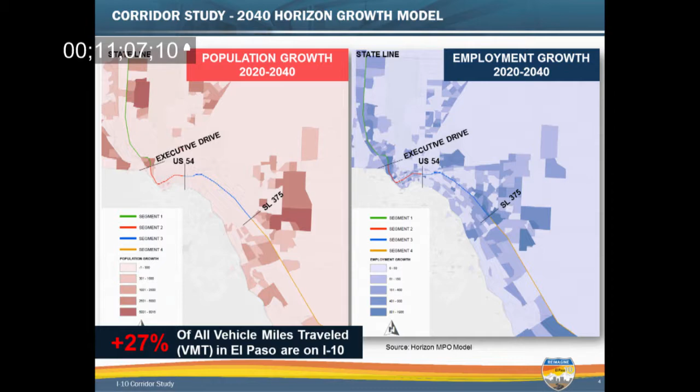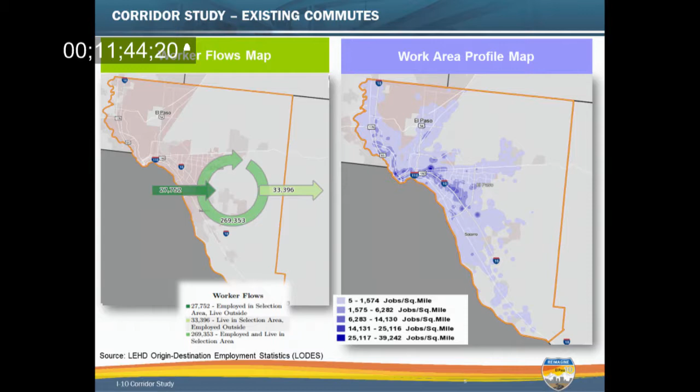However, the employment growth still follows the I-10 corridor, which is still going to be that vital lifeline in El Paso that it has been. We looked at the worker flow map and where the jobs are at and where they're coming from. As we looked at that, the majority of the employment is staying here in the El Paso area. We have some employment that's reaching outside, and some that is leaving this area as well, but the majority of it's staying here. Once again, the work area profile map is centered on I-10. I know this is not new to you guys.

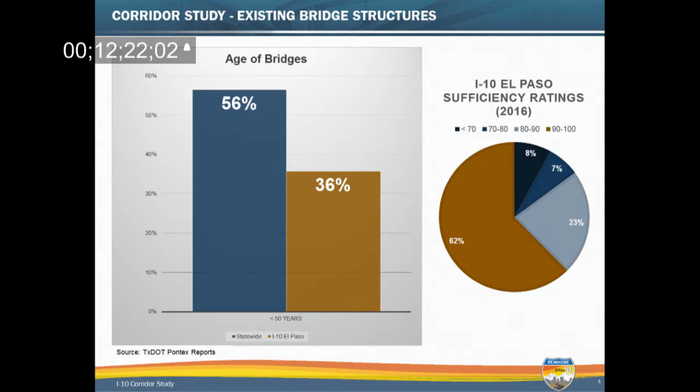One of the other things we wanted to look at is the age of the infrastructure, not only the pavement, but the bridges, especially the bridges. When you look at the El Paso area, 36% of the bridges are less than 50 years old, whereas the statewide average is almost 60% less than 50 years old. So there's a real need to take a look at the infrastructure in the area. The good news is that the sufficiency ratings on the structures still remain high, so we do have some life left in them. But when we're looking at a study that's 30 years into the future, we need to start coming up with a plan to replace that infrastructure. That's one of the things the study is going to do.

We started this study by looking at 6 main goals and objectives we wanted to accomplish. One of them is obviously mobility and circulation—how we improve that, not just on I-10, but also in the areas just adjacent to I-10 and some of the major corridors that parallel it.

We want to make sure we're being good stewards of the environment. We also want to look at multimodal—making sure we've addressed how transit plays into this, how we're addressing truck traffic, as well as the bicycle and pedestrian component.

We want to look at design. One of the key things we're dealing with on this study is the new requirement to have 18.5-foot clearance on major freight routes. That's one of the things we're looking at, which specifically impacts the downtown area when you've got all the bridges going over there right now.

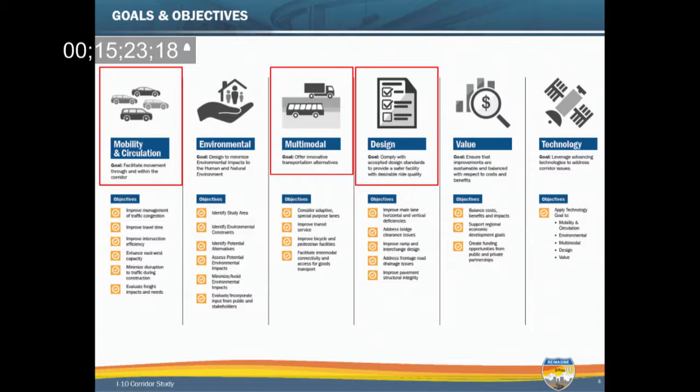So that was kind of the background of the study. I want to get a little bit into the no-build scenario to kind of emphasize what the problem is and the issues that we're trying to solve.

Many of you are probably familiar with the term level of service, but I wanted to talk briefly that it's really just kind of a report card on traffic condition, where A is free flow and F is really pretty much gridlock in the corridor.

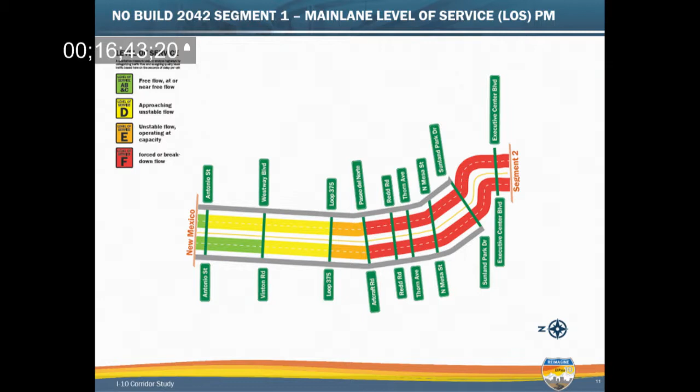So what you're looking at here is a map of segment 1 with 2042 traffic shown on it if we don't do anything to the corridor. You can see that really from Artcraft Road to the downtown area is really going to be operating in a level of service F, or gridlock condition, with the 2042 traffic. So there's an issue there that we need to resolve.

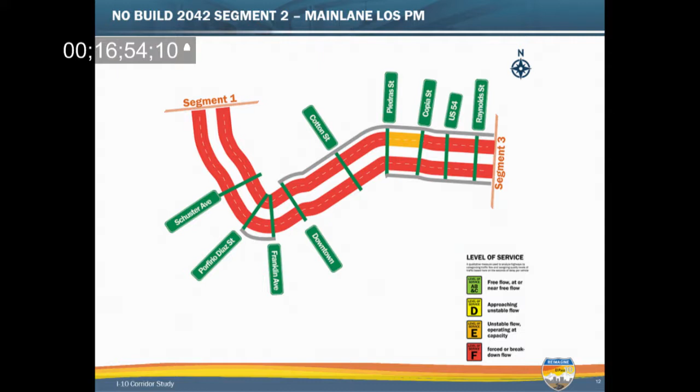I move on to segment 2, which is the downtown from Executive Center to US 54. You can see it's pretty much all red. It's pretty much all level of service F throughout that segment of the corridor.

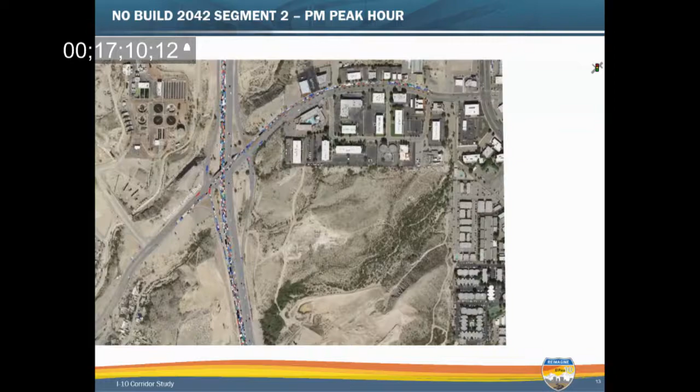Similarly, in segment... well, let me pause for a second and show a traffic simulation model that we developed for segment 2, from Executive Center down to US 54. This really kind of highlights the problem that we're trying to solve.

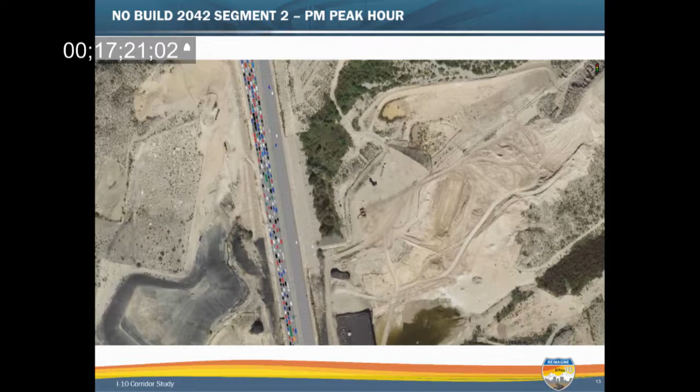What you see is on the eastbound side, severe congestion, obviously gridlock condition, starting at Executive Center Boulevard, and it goes all the way through the downtown area. You might say, well that's great, but look at the westbound side, that looks like it's flowing pretty good. Well, what you'll see in a minute is why it's flowing good is because it's being blocked from a ramp that's congested in the background.

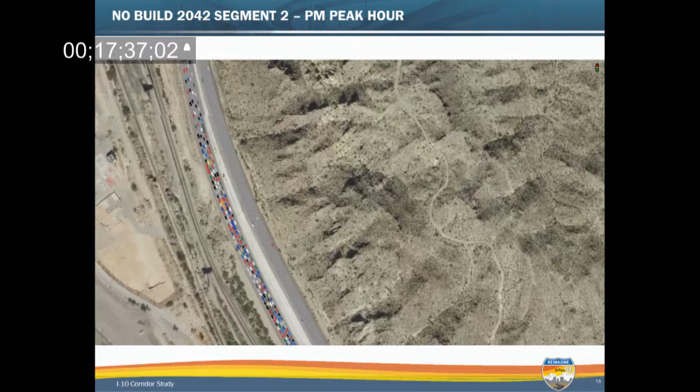Was this taken yesterday? It could have been.

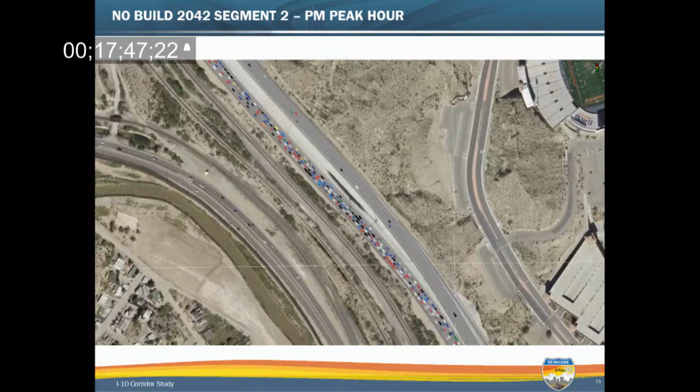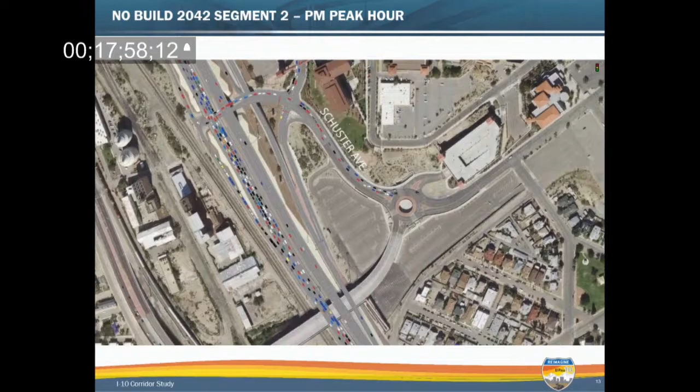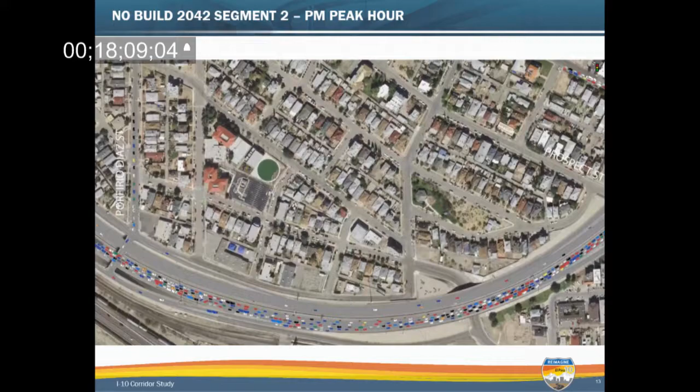So this is a familiar thing that you'll see, and I'll let it run through the downtown area. You'll see this is approaching UTEP right here, the Schuster Avenue. Then as you approach the downtown area, it continues to get bad. Then once you get east of downtown, between downtown and US 54, you can see the congestion on both sides is really significant. Brian, you might want to add that this assumes the Border West has been built.

True, Spur 10 is finished. All of the projects that are currently planned or under construction have been implemented. So you can see right here, coming into the picture, why the westbound was so nice — it's because it's been blocked by the Missouri ramp on the model that we were showing.

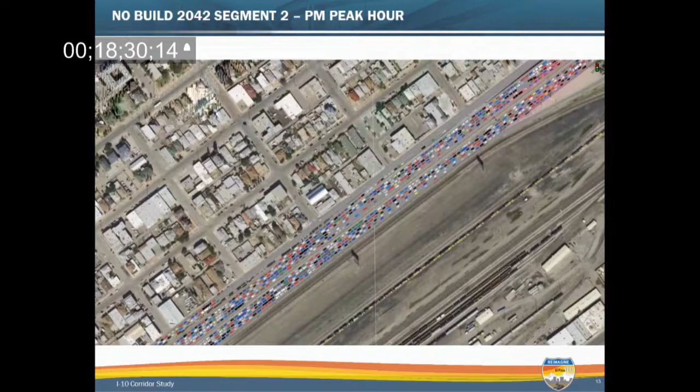So now you're in that piece from downtown to US 54, and both sides are really backed up. But like Brian said, this is not addressing construction — this is not construction driven. It's got all the major projects that are planned included in the model, and that's what we're seeing in 2042. So it shows that there's still an issue that has to be resolved.

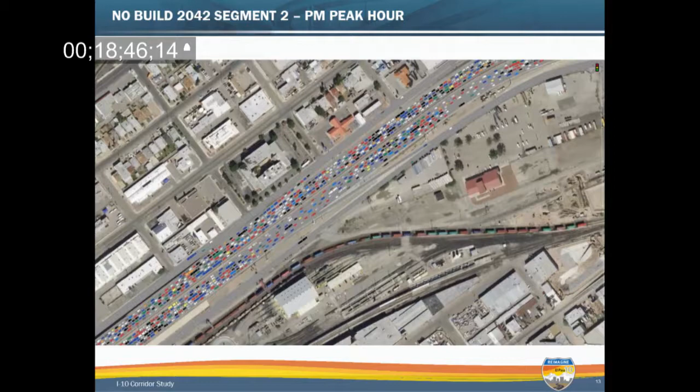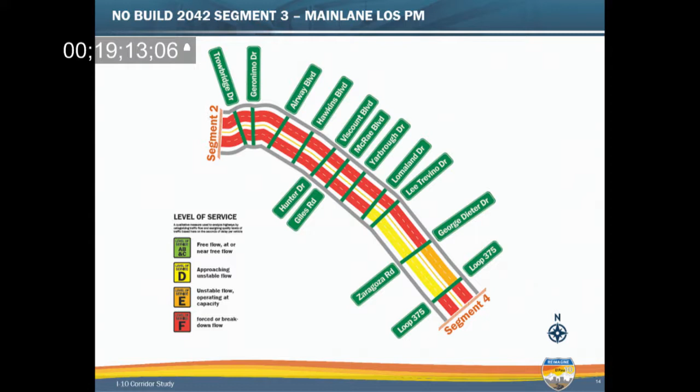I'm going to go ahead and move forward to segment 3, because we have a very similar issue there. As I mentioned before, the big culprit we feel in segment 3 is the number of ramps in that area. We have a ramp density below 1 mile, which is very densely packed ramping. So as you'll see in a minute, one of our solutions is to address that ramping component. But because of all that friction, we're seeing level of service F throughout segment 3 as well.

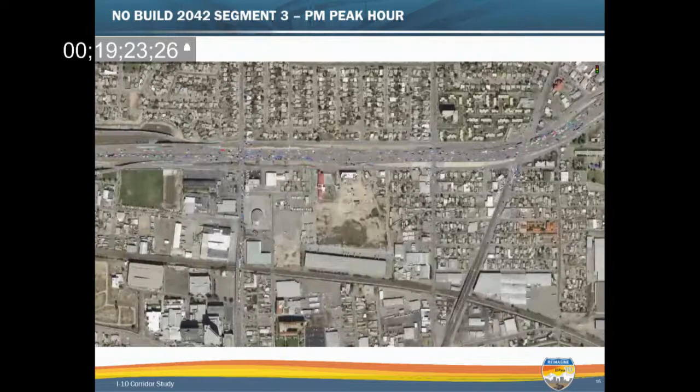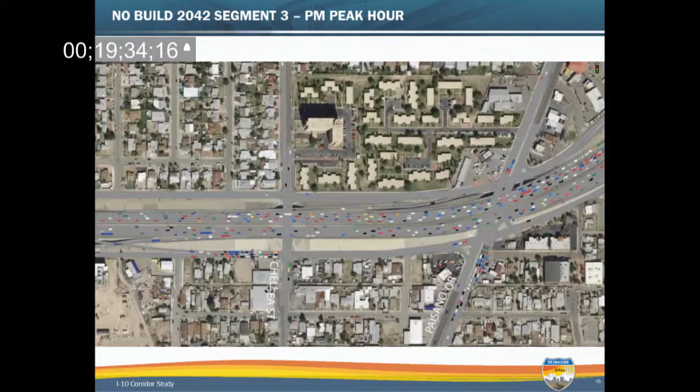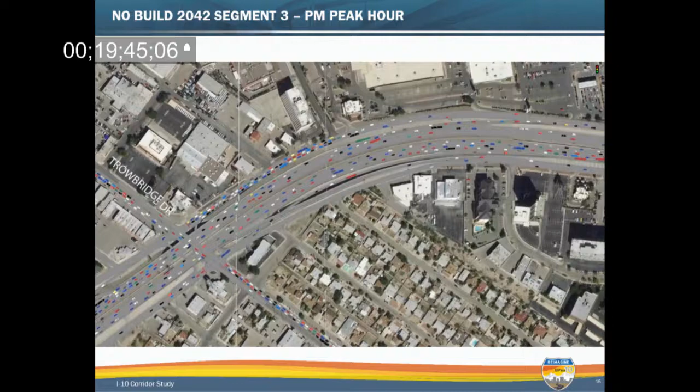Similarly in segment 3, and I'm not going to run through all this, but you can see a similar story that we've got congestion on both sides. Not only congestion on both sides, but we also see major impacts to the arterials, such as Zaragoza and Lee Trevino Boulevard, and all of those arterials that are connecting. It's really not only affecting I-10, it's backing up and affecting the entire network associated with I-10. With I-10 carrying 33% of the vehicle miles traveled in the El Paso area, it's a very important piece, and it's creating an issue when we look at the 2042 traffic model.

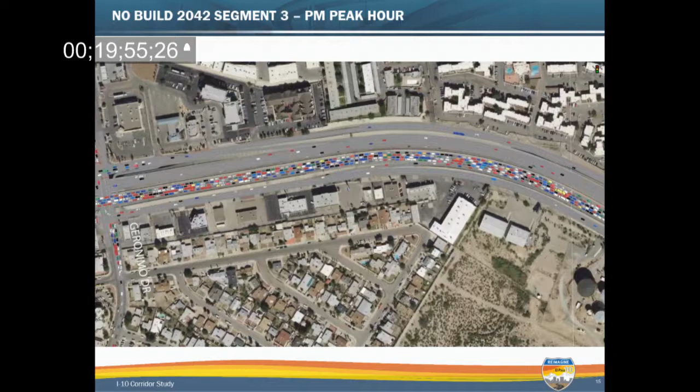Segment 4 is where the news is better. There's a lot of green south of Horizon Boulevard. It really functions pretty well, and in 2042 it still functions pretty well. There's some other issues in segment 4 we want to address, such as the development and growth projected down there, so we want to make sure we've addressed that moving forward.

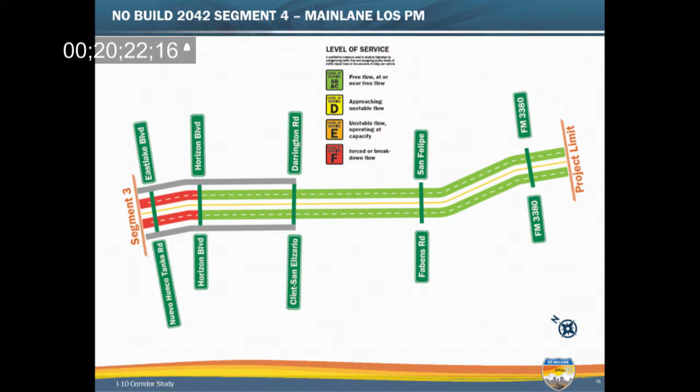So what do we do to resolve those issues? We looked at a number of things, and we're still in the process of doing that. We're not to the final solution yet, but the feasibility study really has three layers we're looking at. One is operational improvements, meaning ramp consolidation, reconfiguration, bottleneck removal—high level things we can address. But we also want to look corridor wide at things like added capacity or adaptive lanes, and also that technology component I mentioned. The idea is to come up with a program of projects that can be built over time, leading to an overall solution, but takes advantage of available funding and keeps pace with future forecasted travel demand. That's the idea behind the study.

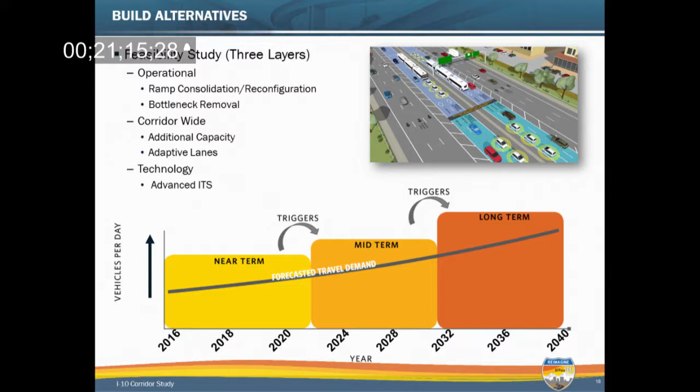So we looked at the operational improvements, and our first blush at solving this problem was removing 35 total ramps along the corridor. I'll remind you it's a 55-mile corridor, so that's a long stretch where those 35 ramps are being removed. We looked at trying to consolidate ramps to address those issues. When we consolidated ramps, we took a look at the resulting impacts to intersections to make sure we weren't loading up an intersection. We enhanced 16 ramps, meaning we added auxiliary lanes to make them function better, and we relocated 77 ramps, moving them slightly to make them function better as well.

We also looked at cross-street improvements. I mentioned the interchanges, but also how those intersections work. We looked at possibilities for innovative and more efficient intersections, such as single-point urban interchanges or diverging diamond interchanges, at places like Artcraft, Hawkins, or Zaragoza—just a couple of areas we're looking at, and there are others as well. All of these go into that operational component of the solution.

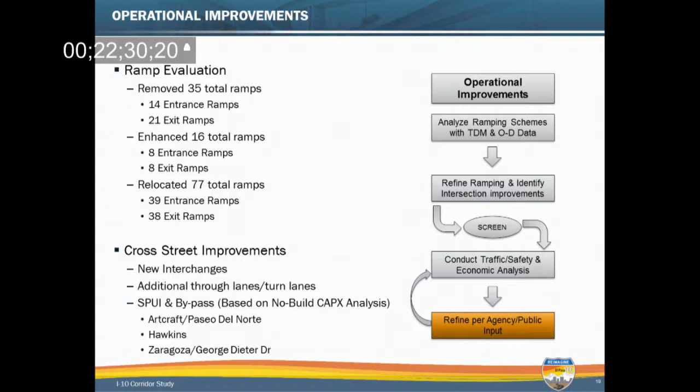Segment 2, including the downtown area, we looked at a number of things as well, and we'll talk more about the downtown area in a minute, so I don't want to spend a lot of time on that. But we did look at ramp consolidation and some frontage road extension through the downtown area. I'll point out that in the downtown area, we're proposing to use Yandell as the westbound frontage road, providing that connection through there, and also connecting Wyoming up with the frontage road adjacent to the UP yard, to provide continuous frontage roads all the way through that area and good access and connectivity.

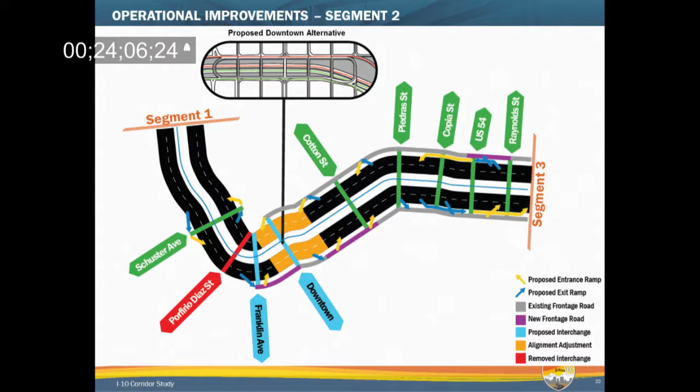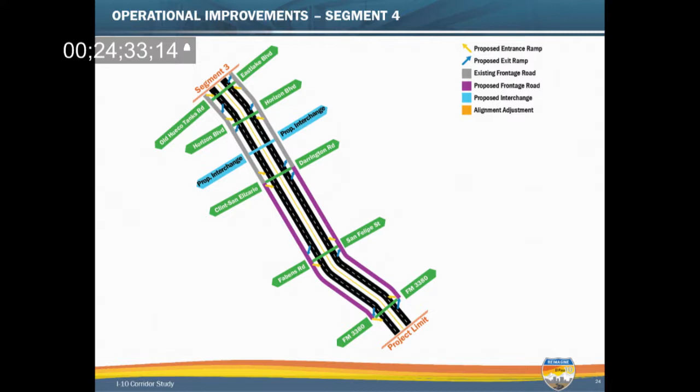And then segment 4, we looked at not only the extension of the frontage roads all the way down to FM 3380, but also the possibility of a new interchange south of Horizon to give a little bit of relief to Horizon and Eastlake. So those are the operational improvements that we're currently proposing to go forward with.

In addition to that, we wanted to layer on top of that and look at the corridor-wide improvements. While we're calling these corridor-wide improvements, they really could vary from segment to segment. Alternative one is simply added capacity, essentially an additional lane in each direction, which coupled with the operational improvements would address quite a bit of our issues.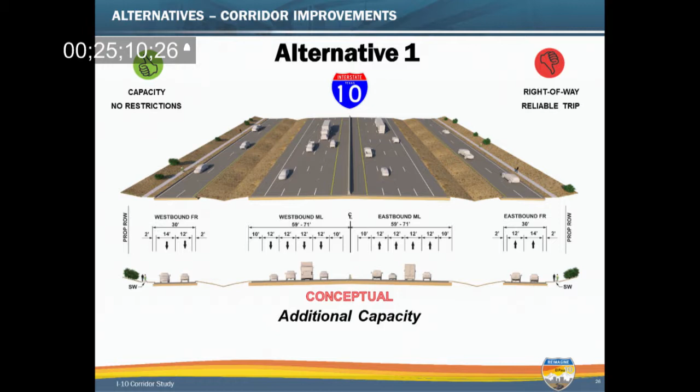There are pros and cons of this. One is it does provide that additional capacity. However, it does take a little bit of right-of-way, and that's something we want to be conscious of.

Alternative two is what we're calling an enhanced shoulder alternative, and this serves a couple of purposes. One is it allows flexibility for the future—if congestion increases faster than expected, it provides the possibility of a peak hour lane if wanted. But probably more importantly, it provides a good opportunity for incident management, and by providing a wider inside shoulder, it gives opportunities for addressing those issues early on.

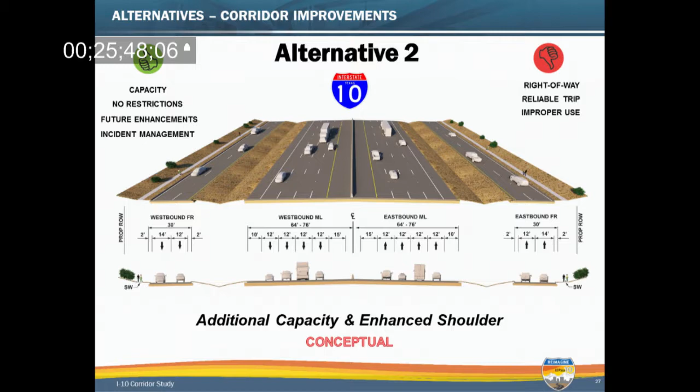The third alternative is what we call an adaptive lane, or a buffer-separated adaptive lane. An adaptive lane is really a lane that can flex and be modified over time depending on what the need is. Our vision is that it could start off as a truck lane, maybe married with an express transit lane, to provide predictable bus and truck movement down the corridor without impacting or mixing with the general purpose lanes.

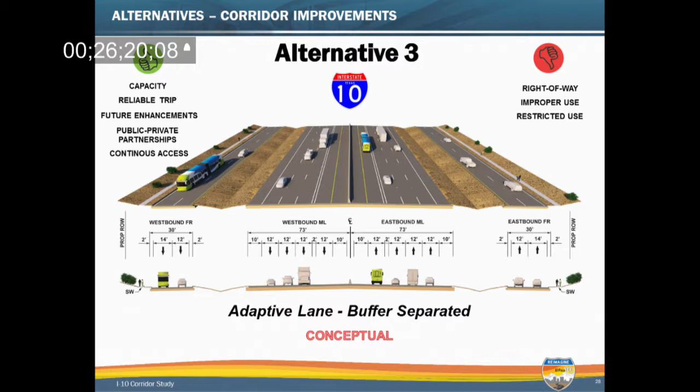Alternative four is the same thing, except it provides a barrier separated between it. While this is a similar alternative, it does limit where your ingress and egress points are—where you can get in and out of this lane. So we want to make sure that we've addressed that as well. So all these are the four corridor-wide alternatives we're taking a look at.

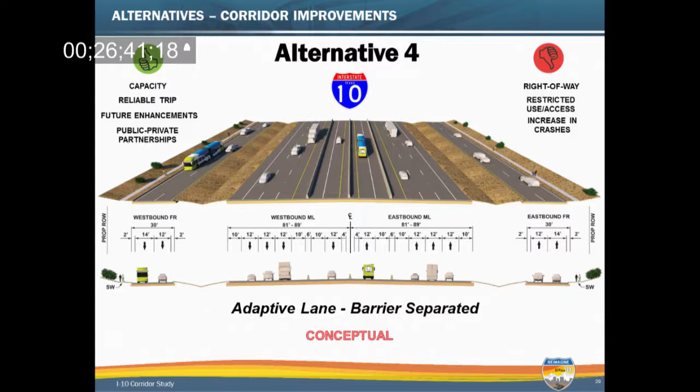So, I'm sorry, go ahead. Which one was the toll road option? I think you'll notice I did not say the word toll road anywhere in that. Just kidding—we didn't use that four-letter word anywhere in this.

So that kind of gets through the overall components of the solution for this corridor study. But I do want to focus a little on the downtown opportunities, because downtown is a unique area. There's a lot going on that we need to address—not only the impacts to I-10 and how improvements might affect it, but how we can make this solution work with the overall city function by improving incident management, connecting downtown to the uptown area, and providing opportunities for a more livable community. We felt the solution was the nexus between those three areas.

I will caution you that the next slides I'm going to show are really concepts, but we just want to show what the possibilities are, because we know that some of our solutions are a little outside the box, and we want to make sure that's pointed out right away.

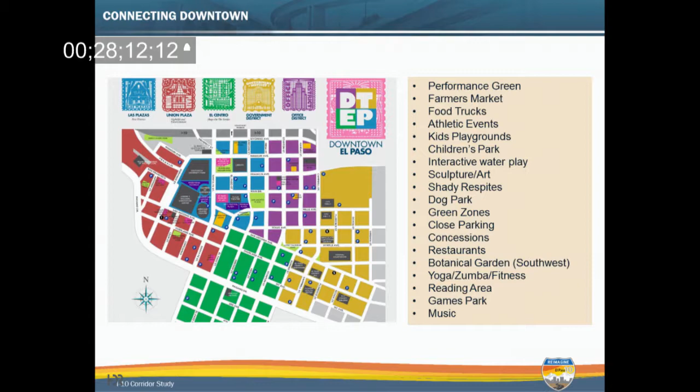We took a hard look at how downtown functions and the five main areas of downtown, and looked at some of the things that might be beneficial to incorporate into an overall solution. There's a lot going on downtown with the ballpark and the convention center, as well as the businesses and historic areas, and a lot of opportunities for good innovation and good solutions.

On your screen here is what happens to the downtown area if nothing is done by 2042. You don't see a lot of vehicle movement because of congestion and standstill—we're talking complete congestion in the downtown area. All the roadways are going to be locked up, especially with Mesa coming down right in the middle of downtown and the traffic it will bring, really congesting the entire downtown area.

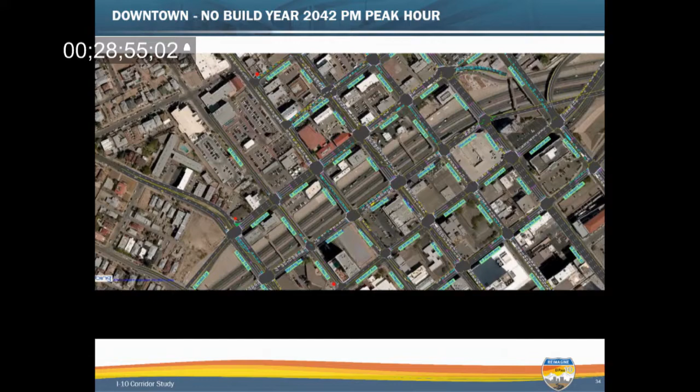So we felt the only way to address this is to come up with some ideas that address the mobility, even though some may be a little radical, while providing good connections from uptown to downtown, and also addressing the I-10 component as well.

The conceptual ideas I'm going to show have full cover and partial cover options. Some show a complete tunnel under downtown, others don't. But all of them can be incorporated in either a full cover tunnel or a partial cover tunnel. The advantage of partial cover is that you don't have to address fire suppression and ventilation as much as you do on the full cover.

So there's some things we're considering right now. All of these are very preliminary and very conceptual, and I don't think I can say that enough times before I move on to the next slide.

The first one I'm going to show is what we call the circuit. The circuit basically takes all the traffic in the downtown area and moves it around using Yandell and Wyoming as a circuit, but we do have Mesa coming through the middle of it, so it looks something like this. You'll notice we have Santa Fe on the west side and Campbell on the east side continuing through.

Other than Mesa, the other cross-street bridges have been removed in this area. As Bob mentioned earlier, all of these bridges are going to have to be removed in the future anyway, so as we're doing that, we're taking a look at which ones we put back and how we put them back. That's something we're taking a look at.

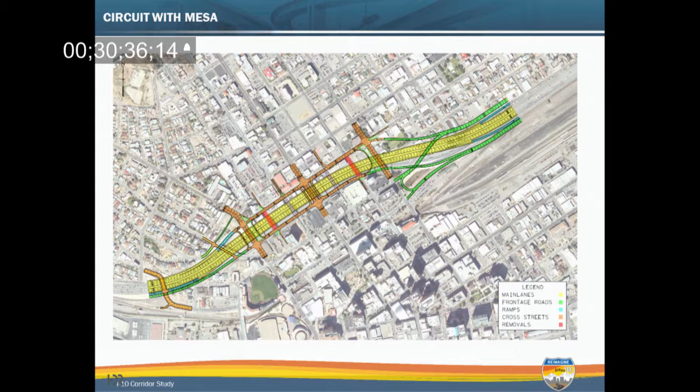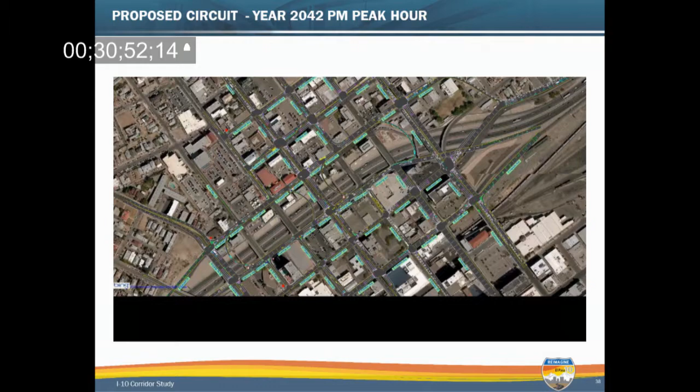This would provide Mesa a good connection to the frontage road, still provide good circulation between uptown and downtown, and address the traffic congestion we were showing, because this actually does work. You can see in this simulation that traffic is moving, not only on Wyoming and Yandell, but also in the arterials just off the corridor. So it is a solution that works with the 2042 traffic.

So what would this look like? There were several different ideas. You give architects a little leeway and they go crazy with it, so what you're going to see here is our architects kind of going crazy.

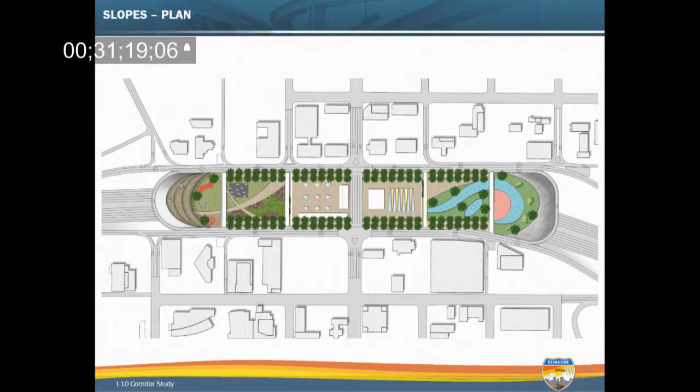Here's some ideas, with I-10 underneath. It provides an opportunity to not only maintain that circulation, but creates a lot of opportunity for amenities on top, whether it's active, cultural, civic, or even quiet areas. I'll point out that El Paso downtown is unique because we've got nice squares that could be developed. This could be done all together, or it could be done in partial pieces.

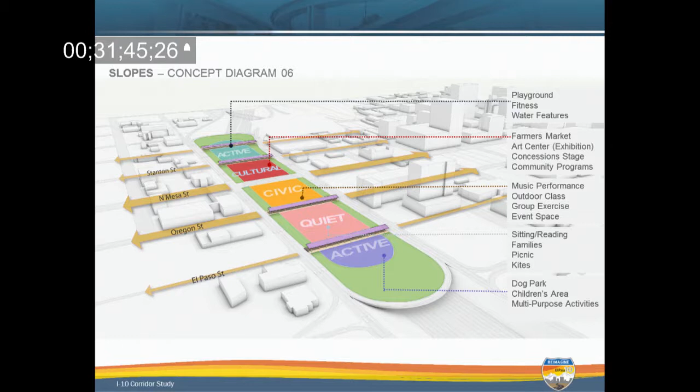Gaining momentum as funding becomes available, so there are some possibilities with that. You end up getting a solution that would provide a nice centerpiece for El Paso, but most importantly, it's addressing the mobility and circulation issues that we need to address on I-10.

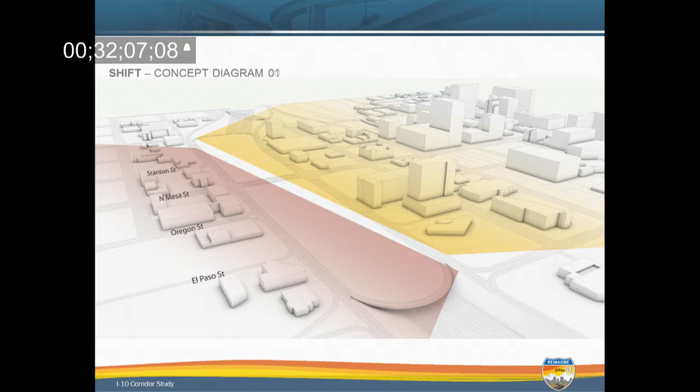Another one with Mesa with the circuit is a shift, it's just a variation on it. They got creative on this one, and a little abstract, and it provided another concept to show how it might come together, where you have a farmer's market and music performance and things like that. They were dreaming big about what could happen with a situation like this, once again providing those amenities but addressing the mobility in the corridor as well.

Can I ask you a technical question? Let me go back. If you show one of those concepts, I think it's pretty unique. One reason is I-10 is depressed through there, so you've got the two sides that are connected.

And if you did some mixed use, who would own what now, would it be property or air rights? Would we have to buy the air rights from the state if you were to put activities there, would there be actual building facilities on those overpasses? I mean, would there be revenue generating possibilities, and who owns the property?

Well, I'll let Bob answer that in a second, but I think the key is that it provides a lot of opportunity for private funding. So would the city go to the state and say we'll offer you air rights, or purchase your air rights, and we build a cultural center where you have entertainment, you're charging a fee, people come, is that how it would work? Now Bob, I don't want to speak for you.

Well, that's what I'm asking - it goes up into infinity. But I think it's something that can be worked out. It was done in Dallas, so I think we have a model we can follow. I haven't talked to Kelly, so I don't know exactly how they did it, but it certainly is possible. Even now, when somebody builds across the road, the city has say-so on purchasing those air rights.

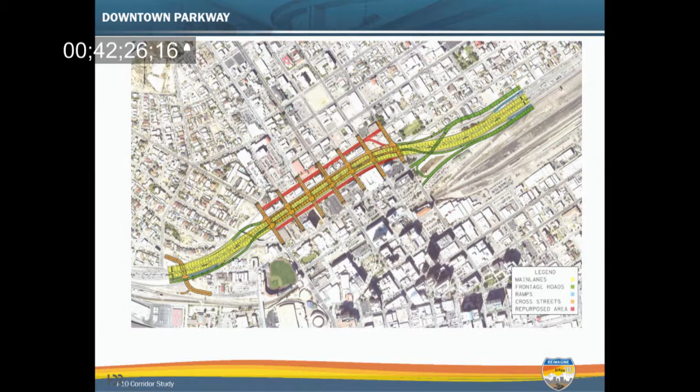We'll point out that while we are showing all of them going across here, it functions better if we eliminate some of the internal ones other than Mesa, Santa Fe, and Campbell. It functions much better because you're eliminating the number of signals.

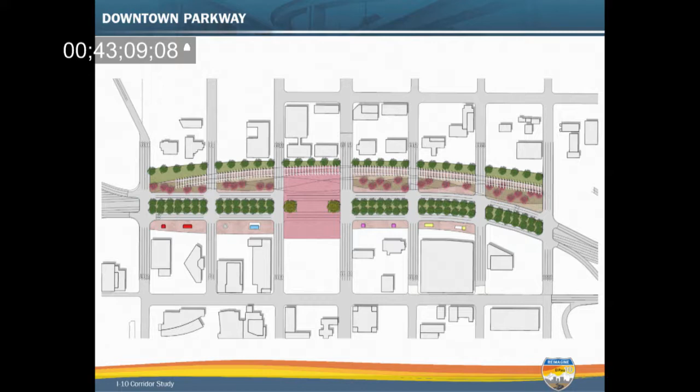This is the Parkway alternative with 2042 traffic, and you can see that it flows very well even on the frontage roads throughout the area. This might look like the frontage roads coming together on top of I-10 in a parkway scenario. Now the development, instead of being right in the middle on top of I-10, is more to one side, but it still has the same potential development component and provides the same possibilities for development.

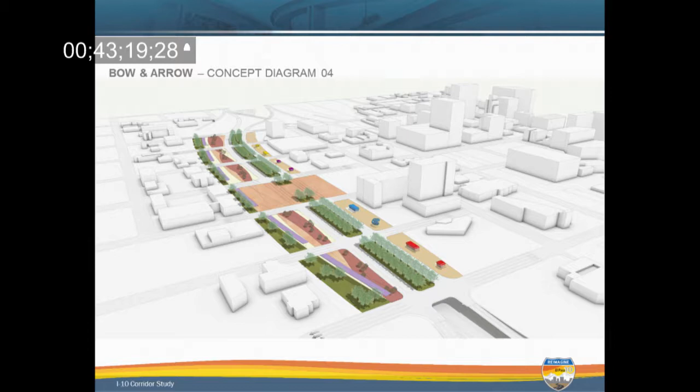Our architects like to call this one the bow and arrow, I guess because it looks like a bow. But you can see that it does provide some of the same similar amenities that the other alternative had. Those are the two base alternatives.

We are looking at other things as well, and I wanted to go over them briefly. One is what we call the Santa Fe bypass lane. Basically it's an alternative that provides a ramp directly to Santa Fe to try to access the ballpark and the Civic Center and provide a better connection on the west side of downtown.

What we call elevated Mesa is essentially the circuit alternative I showed you earlier with Mesa, except Mesa is now on the third level, with connections from Mesa directly to I-10. Instead of having to go through the frontage road component, you would go directly to I-10. So it's another one we're looking at.

We also have the ramp modification, which is simply removing one of the ramps approaching from the east. This alternative doesn't solve the problem completely, but it makes it better, so we're looking at how that one might work.

And then the last one is Mesa connectors, which is really just direct connectors from Mesa to I-10 in an elevated section — a third level in the downtown area. So those are four other ones we're looking at to see what possibilities they might have.

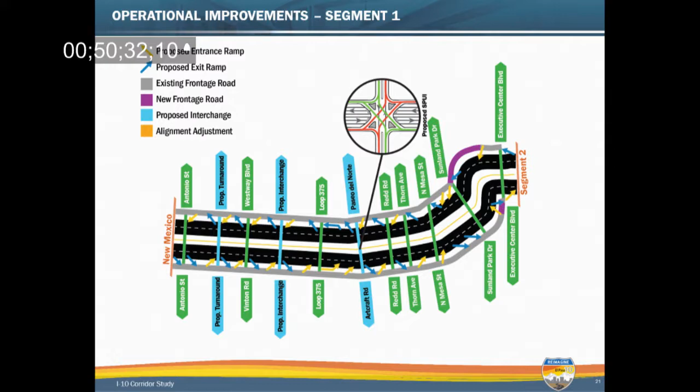That's the idea. It could be as simple as adding a through lane or a right turn lane, or it could be what you're talking about, those innovative intersections, the single point urban interchanges, shown on that inset image, or a diverging diamond like they have at the 601, 375 you were talking about. I think there's another one there, but we are looking at all those possibilities as solutions to the problem.

So what's the next step to communicate with TxDOT on, going back to downtown, the crucial future plan of getting the bridge designs that could accommodate those outlandish options if need be? Is there a way to get that in the plan? Because they need to be in your plans.

Well, we've put, is it 500? Outlandish was kind, I mean. I like that. I'm just saying, if we do that, it would be crazy to go back and try to fix it. We should design what's coming up regardless. Right, we have 500 million today for downtown, if I'm not mistaken.

So that's a start. What I really need to do, with the help of everybody in this room and the chamber and everybody else, is make that case in Austin and to the commission. But we also need to have a good estimate of what that is going to cost and what the different variations are going to cost. That's one of the things the team's going to be working on pretty hard right now, because there's a gap.

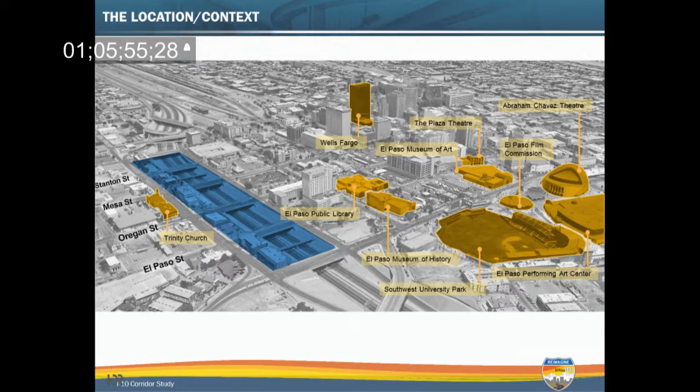The blue area, that's kind of former Mayor Caballero's idea, but transposed to another area. His idea was a Central Park - I think Susie Byrd and possibly Veronica Escobar, when they were staffers, worked on it. It was to take the railroad going all the way down to Lincoln Center - if you could take the railroad tracks out, we could have a Central Park. So this seems like a Central Park down in the middle of town. And during one of our many arena vigorous debates in El Paso, former Mayor Francis said, well, we could just pave over the top of I-10 and build our arena there. So your concepts weren't really that nutty after all.

Mr. Bielek, I enjoyed the presentation. I attended one of the much earlier ones at Viscount Community Center, probably over a year ago. So to see things laid out, it's darn interesting. At that time you had the whole route laid out - from the border to Tornillo. Sections of it, plenty of staffers were available to take you through it. It had problem areas, you could make all the comments you wanted. At one time I was talking to you - you said you had to rebuild the downtown area, I don't know how far, but you said in today's dollars you were talking about $1.5 to $2 billion. I mean, just a lot of loot. So I see why you want to get this out and let people know what's going on. I understand.

By asking some discreet questions, I understand a trolley issue might come up next month - a trolley expansion from the connection downtown, possibly over to UMC. We don't even have our current trolley up. There are many citizens that wonder, are Mr. Bielek's daily passenger ridership numbers correct? Are we going to have a white elephant and the taxpayers are going to pick it up? I sure hope it's successful. Great briefing, thanks for laying out the money constraints, thanks for giving us a variety of interesting ideas to think about. We're talking out to, what, 2035? For the entire study. Yeah, so thank you.